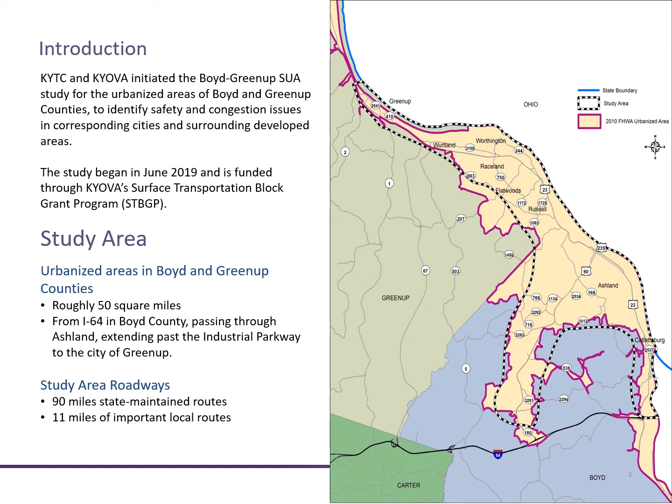As of the February 2020 status update, previous studies and committed projects were identified, existing conditions and traffic operations were inventoried, 3-year crash analyses were completed, environmental research was underway, initial and public meetings were held, and online public engagement activities were wrapping up.

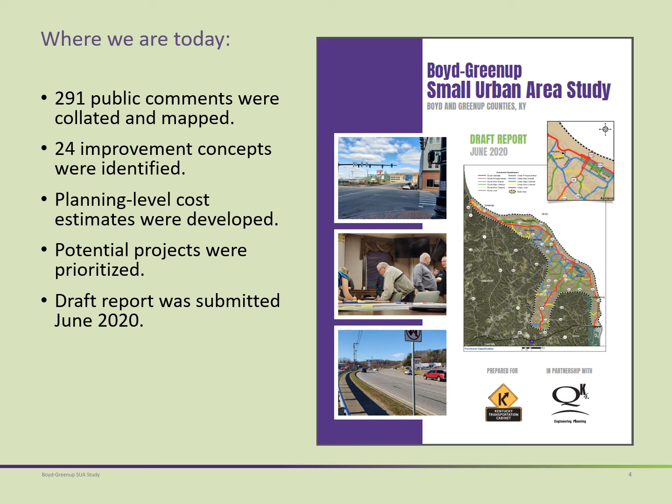Since February, 291 public comments were collated and mapped, 24 improvement concepts were identified, planning level cost estimates were developed, potential projects were prioritized, and the draft report was submitted in June 2020.

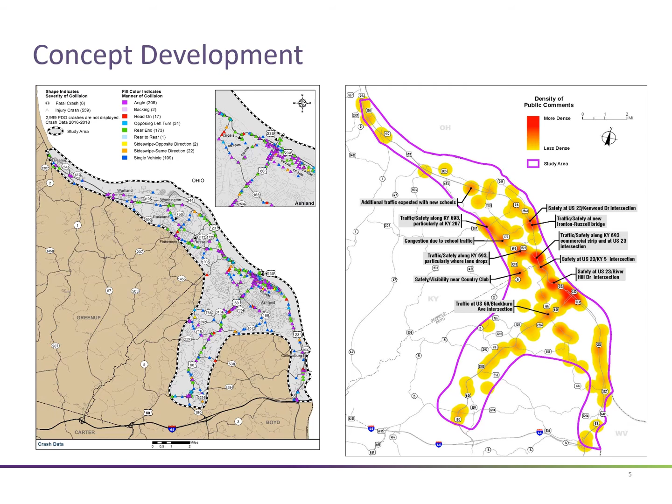Concept development. Improvement concepts focus primarily on areas with existing safety concerns identified by documented crash records and community input. Crash data is shown on the left and a heat map of public comments on the right. Project team members produced a list of improvement concepts which included 9 long-term projects shown in yellow on the map to the right, 10 short-term shown in orange, and 5 local projects shown in pink.

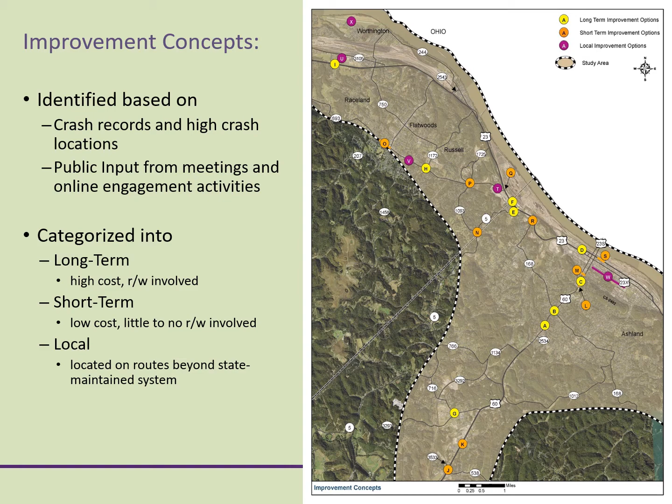Prioritization. In May 2020, a webinar and online survey were used to capture local officials' and stakeholders' priorities for identified improvement concepts. The process incorporated traffic operations, safety considerations, project team input, local officials' rankings, and other factors for placement into high, medium, or low categories. An exception to the process was made for short-term projects.

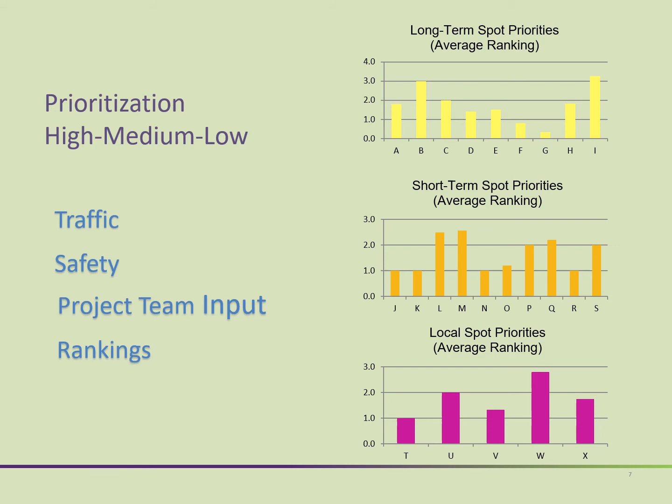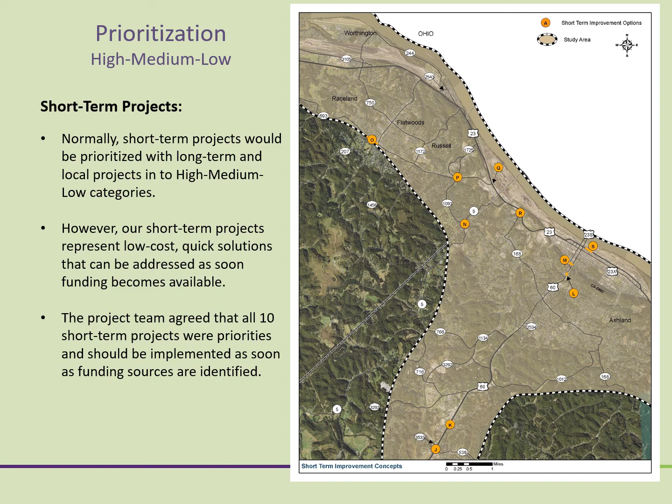By nature, the short-term spot improvements represent low-cost, quick solutions that can be addressed as soon as funding becomes available. Rather than prioritize these, the project team agreed that all 10 short-term spots represent short-term priorities. Many represent maintenance actions independent of more competitive funding streams. Short-term spot improvement locations are presented on the map at the right of the screen and summarized in the table that follows.

The short-term spots are mostly intersection improvements to improve visibility through high-vis backplates, advanced warning signs, fresh striping, or clearing vegetation. Other locations examine warrants to upgrade stop signs or signals. 7 high-priority spots include a mix of improvement types, from added turn lanes to minor widening and realignment.

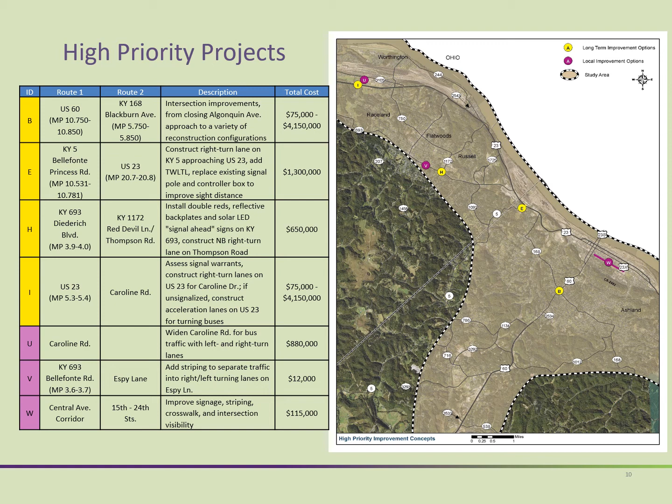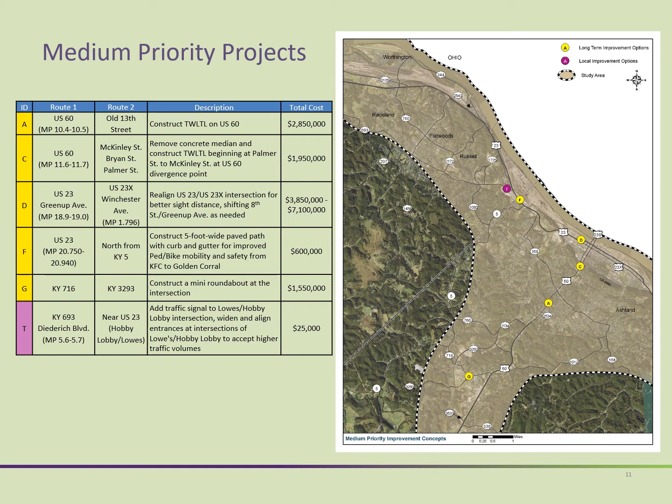The 6 medium priority projects include adding 2-way left turn lanes along portions of US 60, reconstructing intersections to improve performance, adding sidewalk, and installing another traffic signal along Diederich Boulevard. One remaining concept was rated a low priority. It was a planning study to examine improved mobility from the Ashland Airport to US 23. This project corresponds to CHAF number IP 2004-0035.

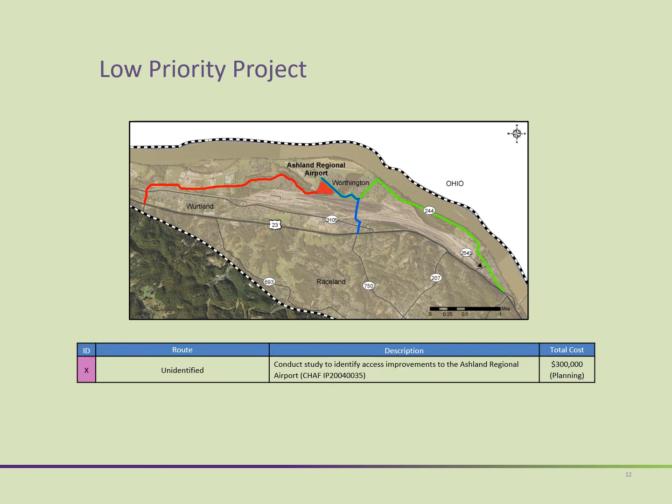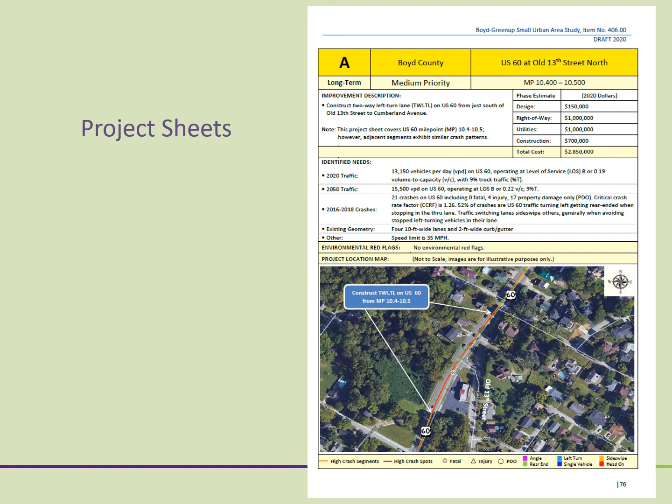As part of this study effort, individual detailed project sheets were developed and are included in the report for quick reference. The final report will be submitted in August 2020.